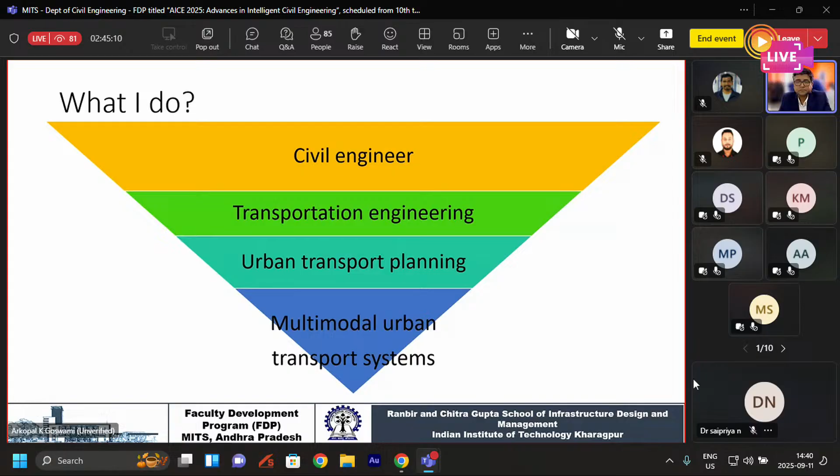And my work in the industry prior to my academic job was mostly in the urban transport sector. So when I decided to come and teach, I decided that that should be something I should focus my research and teaching on. So mostly I work in the area of multimodal urban transport systems currently. And what is multimodal urban transport systems? I mostly deal with urban surface transport, modes of transport that run on roads. Urban transport nowadays can also include water metros, but I don't deal with them a whole lot. And the modern way of transportation is looking at urban air taxis or even hyperloops, which I have not gotten into yet; my expertise is not in those fields. So mostly what I'm looking at is multimodal urban surface transport systems.

And it is an amalgamation of all of these various domains. So it is purely multidisciplinary in nature, where a student working on any problem at any given point in time has to have knowledge of at least two, if not three of these sectors, right? You have to at least understand street design, data analytics, urban planning and land use. Along with that, if you are interested, you need to understand user travel behavior, economics and econometrics, environmental sciences, which today's topic is relevant to, and information technology and infrastructure management. So there are so many branches of expertise that you need to solve any of the urban transport problems. That makes it very challenging. That's why we are constantly looking for specialized personnel in this field. So when we develop curriculum, we keep in mind that somebody graduating from our institutes is well versed in 2 or 3 of these domain areas, so that they can solve an urban transport problem holistically.

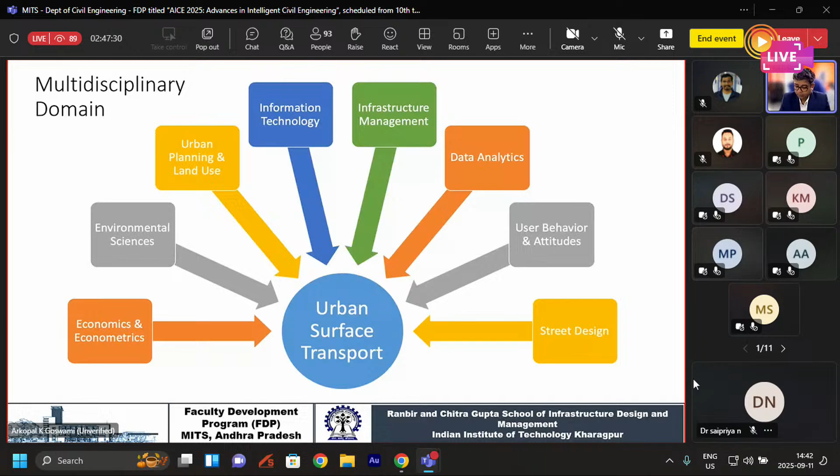Now, to give you an overview of urban transport and sustainability, right? Sustainability is something that we cannot shy away from anymore. Any system that you talk about, you have to think in terms of sustainability. But if you look at the urban transport scenario, you will see that there's a lot of unsustainability happening in India currently. Our motorization rate is growing at an alarming pace. The number of accidents on our roads is also growing at a similarly alarming pace, and the emissions are increasing day by day. So this trifecta of events is leading to a lot of issues or externalities in the urban transport scenario, where we see long traffic jams every day in metropolitan areas, or very poor infrastructure degradation happening even in smaller towns and cities.

And of course, when we talk about affordability, we see that the people who cannot afford expensive cars are left to contend with public transportation, which is not being upgraded, which is in poor condition, and over-congested systems. So affordability is going down, and equity is not being maintained.

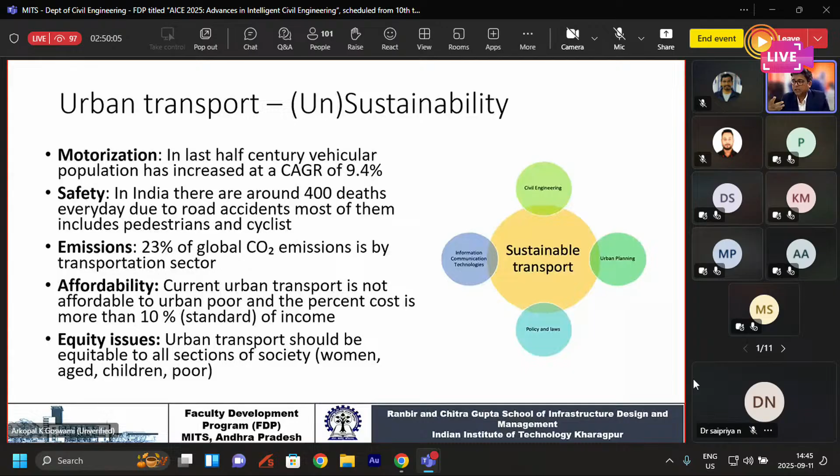A project is then looked upon as not solving the issues of the poor, but only looking at a certain section of society. So, all of these things put together, we are seeing a lot of unsustainability happening in India. And what I see is a cycle in which our cities are currently stuck. Right? If you look at this cycle, you will see that some of the things are an input to this cycle. Of course,

inputs to transportation which we cannot control, such as population growth and concentration of jobs in cities, right? There's a lot of population growth happening and many jobs being in the cities. A lot of people are migrating to cities, right? That is nothing that transportation engineers and planners can control. I mean, there's very little we can do in order to control that.

As a result of people having now suddenly moved to the city and having relatively better paying jobs, their household income is increasing. As the income increases, the first thing people think about is to own a motorized vehicle. It may be a motorized two-wheeler or a motorized four-wheeler. So now you have people who have moved to the cities and are starting to own more and more vehicles, which is now leading to the city's transport infrastructure being stressed.

Right, most of our cities are old. They do not have sufficient road network, and even if they have sufficient road network, the quality is very poor. On top of it, when this additional number of vehicles starts to ply, there's a lot of stress on this transport infrastructure.

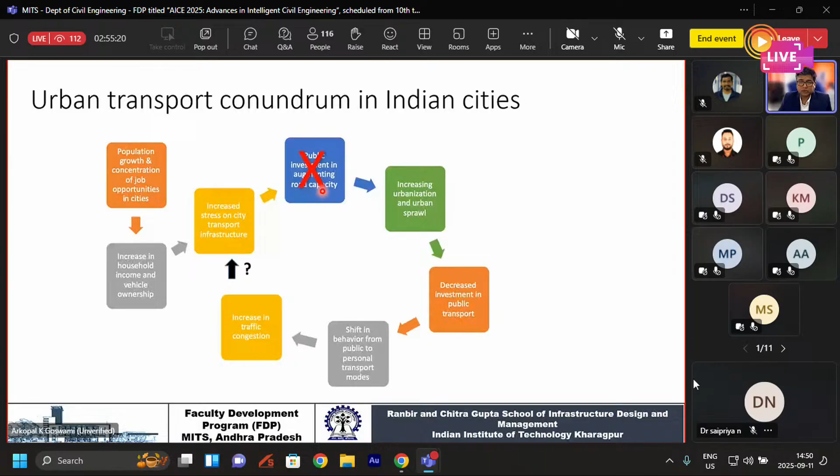So what experts say is one of the ways to do it is to not invest heavily in road capacity augmentation. Do not just widen roads. Widening roads is not a solution for reducing congestion or reducing emissions on the streets. So that's why many cities now are heavily investing in mass rapid transit systems like metros and LRT systems and other alternative public transport systems rather than widening roads, because they are not seeing the benefit of reduced congestion. So somewhere along the line, every city has to think about this.

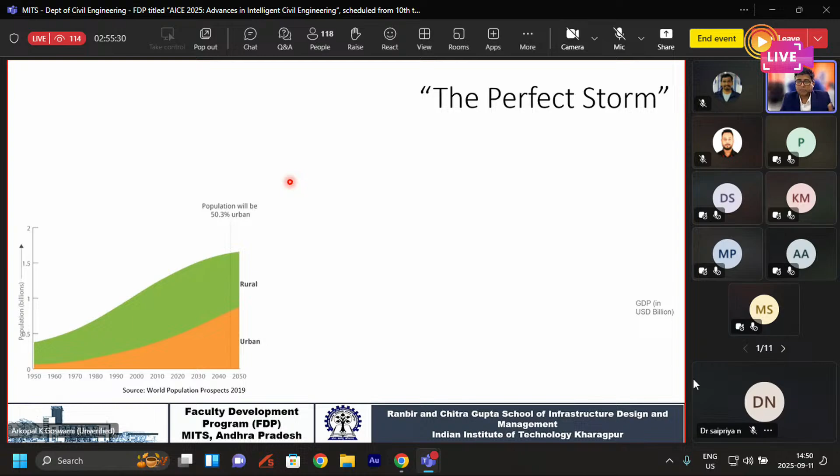Same thing graphically, if you look, there's so much rural to urban population that is migrating. If you start looking at imagery of your cities, just pick any city that you are living in, and if you start looking at the land use patterns over decades, you will see that the city is urbanizing. So this is the city of Kolkata. You will see that the red was the urban area back in 1991, but in 2017, the red has increased so much. So you'll see that there's so many people. Because of the influx of people from surrounding areas, the city starts sprawling.

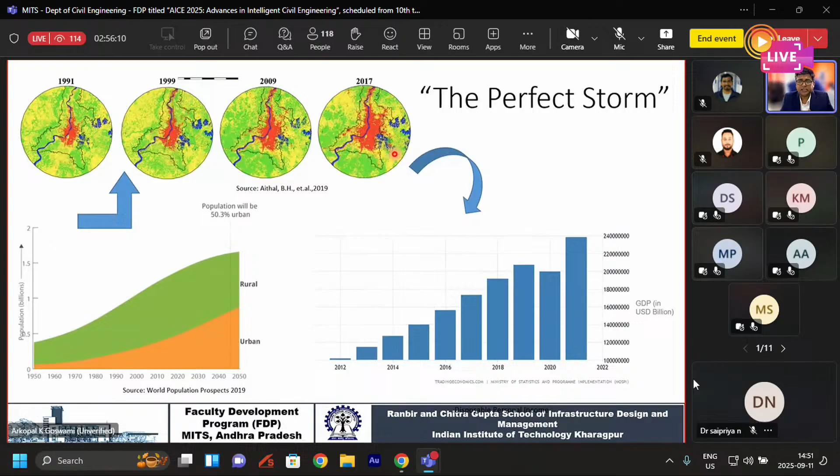As the city starts sprawling, the GDP improves, as urban areas are the engines of GDP growth. GDP increases. People have disposable income. You start looking at the number of cars registered. That is increasing exponentially. And if you start looking also at the borrowing rate, it is getting cheaper and easier to buy a car, because nobody pays full to buy a car, they purchase it at EMI. So the EMIs are getting lucrative over the years as well. And so a lot of people are owning these cars.

And this is leading to, of course, not just accidents, but also a lot of particulate matter emissions in our cities. Our cities during winters are becoming gas chambers. You cannot get out. You cannot breathe properly. The young are having a lot of pulmonary diseases. The elderly are not able to breathe properly. So this is an epidemic of gigantic proportions that is taking place in India.

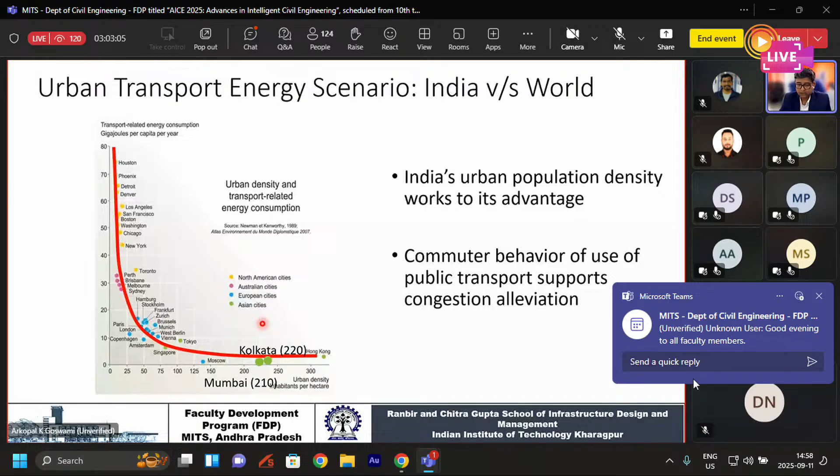All of this leads to our topic today of transport and environment, where we see that in the emission scenario, the transport sector is one of the most poorly placed sectors. Looking at different economic sectors, after electricity and heat production and manufacturing, you have 22% coming from the transport sector. So transport is responsible for almost 1/5 of carbon dioxide emissions, and we have to be very careful to develop strategies that help us reduce this 22% figure. This is a worldwide figure.

If you get into different modes of transportation, within this 22%, personal vehicles result in 40% of those emissions, and trucks and light motor vehicles are 34%. Put together, the surface transport sector is about 74-75% of the emissions coming out of the transport sector. So when we are dealing with cars and commercial goods vehicles in our cities, we have to be very mindful of how we can continuously monitor their emissions, improve the quality of mechanical equipment present in the vehicles, and at the same time decarbonize these vehicles.

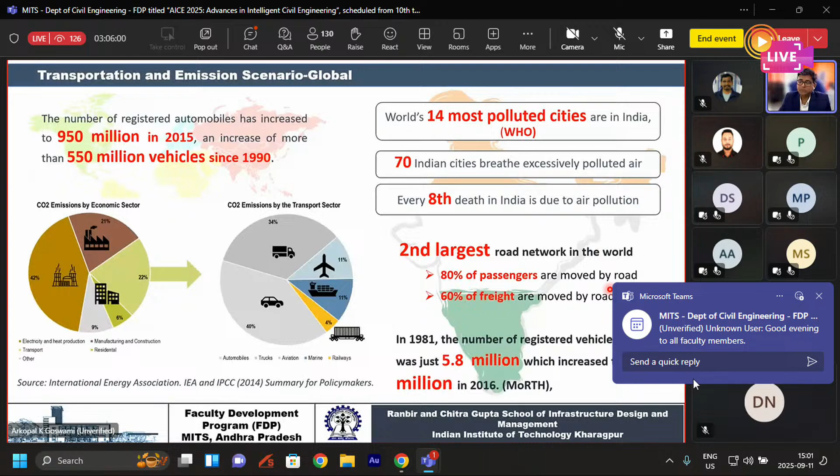This is again a snapshot. If you look at a calendar year, it shows Delhi's particulate matter PM 2.5, and you see that it is only during these monsoon months when you see a lot of green. Anything other than these monsoon months, you start seeing orange, red, and as you get into the winter season, December, January, February, there's a lot of poor air quality leading up to almost April and May, the peak summer months as well. So many days are way above the WHO limits that are prescribed, and it becomes very, very harmful to

citizens of various age groups. Vulnerable people who do not have a proper home to live in the urban areas, who are homeless, living in shelters, etc., are even more vulnerable, but so are people who are outdoors. If you remain outdoors for long periods of time, if your exposure is high, you are now having these irritable eyes, a lot of sneezing, and if you have asthma, you are really advised not to go out. So all of this is affecting our health, and health is eventually affecting productivity. If you want to tie it up to GDP, then you can see that all of this is eventually having an effect on the GDP of the country as well.

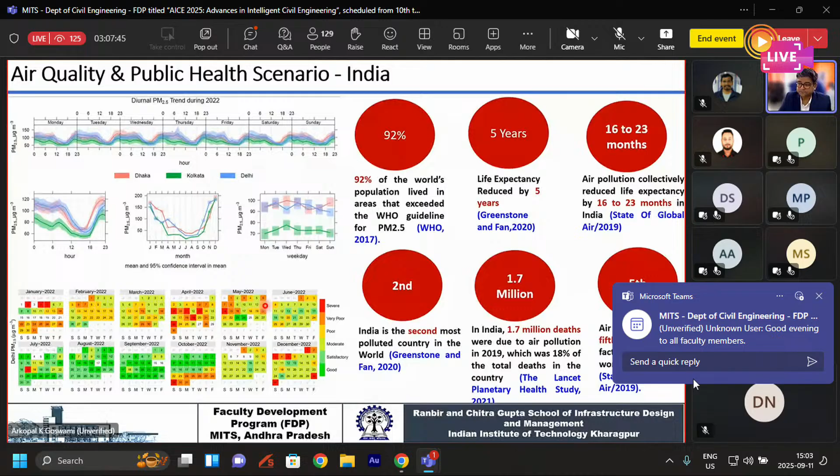As such, India and many other countries are now starting to heavily invest in sustainable modes of transport. Like I said, metro rails have been there in India for a long period of time. Kolkata was the first one to get metro rail. Nowadays, many cities are investing in that. But at the same time, metro rail is not an answer to all the cities. So there are many cities that are also looking at examples such as water metros, monorail, and BRT, which is bus rapid transit. So a lot of such mass transit investments are being made, with the intent to not only decongest the roads, but also to improve the environment or reduce the vehicle-related emissions.

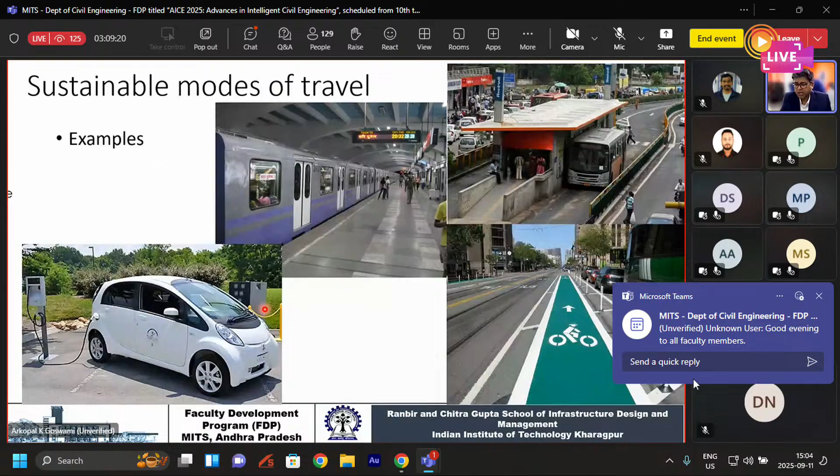These are examples of BRT, and as a part of that, electric vehicles come in, where now the tailpipe emissions can be completely or almost 99% reduced when you are using an electric vehicle. And we'll get into electric vehicles a bit more during the remaining part of our presentation. There are other modes of transport that are also getting some reasonable amount of attention now, which is improving bicycling in many of the cities, improving pedestrian infrastructure in many of the cities, and also some examples of

flexible work schedules, carpooling, etc., are also being implemented or experimented with when it comes to large employers, especially. They are encouraged that their employees should either carpool or try to reduce their travel to office every day by having a flexible work schedule. Maybe come into office 3 days a week, and the rest 2 days can be work from home or something like that, which eventually ends up helping the traffic congestion and traffic environment situation.

Congestion pricing is something that India has not yet successfully come up with a policy for, but many of the cities around the world which have faced a lot of urban transport related issues have tried out congestion pricing, which is to say that if you are using your personal vehicle and driving it alone, then you will have to pay an additional toll when you use it during peak hours, because peak hours are already congested. Peak hours already have a lot of emissions happening on the roads, and you as an individual are adding to that emission, adding to that worsening situation, and hence you are being asked to pay the price for using the road during that period of time. This has helped many of the other cities in the world reduce the number of personal vehicle users as they then shift to public transportation, and in that way helps reduce congestion as well as improve air quality.

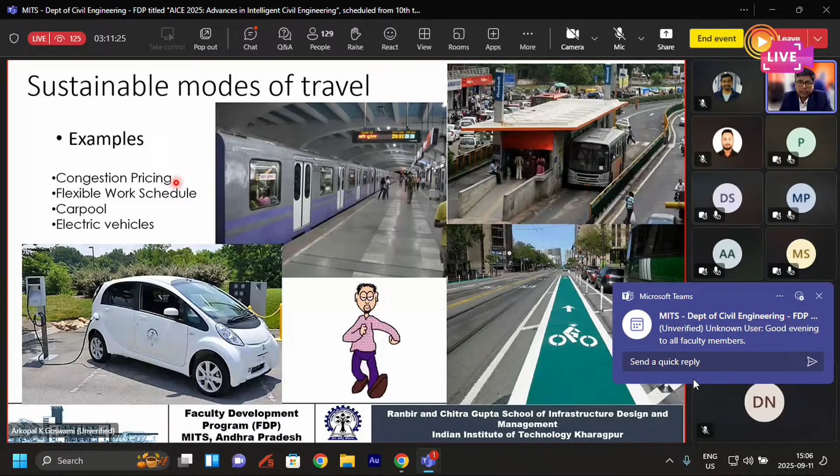In India, you will see that there are a lot of monitoring and mitigation programs that have been introduced over the years. We have our emission standards for every vehicle that are set up by the Automotive Research Association of India, ARAI, which tells you how much emissions are going to come out of which type of engine, which type of vehicle, etc. So all the manufacturers have to follow these standards, and then of course when the vehicle starts getting older, you have to get your pollution under control certificate, PUC certification, every year or every 6 months, so that it can be confirmed that your vehicle is still not polluting heavily on the roads. Such kind of systems are in place.

There has been improvement in the fuel technologies. Now we are at BS6. We have jumped from BS4 to BS6, which has reduced the content of nitrous oxides, etc., in the fuel, and hence we don't see those black fumes that we used to see a lot coming out of, say, for example, heavy vehicles in our cities, trucks, etc. Now that has reduced to a large extent.

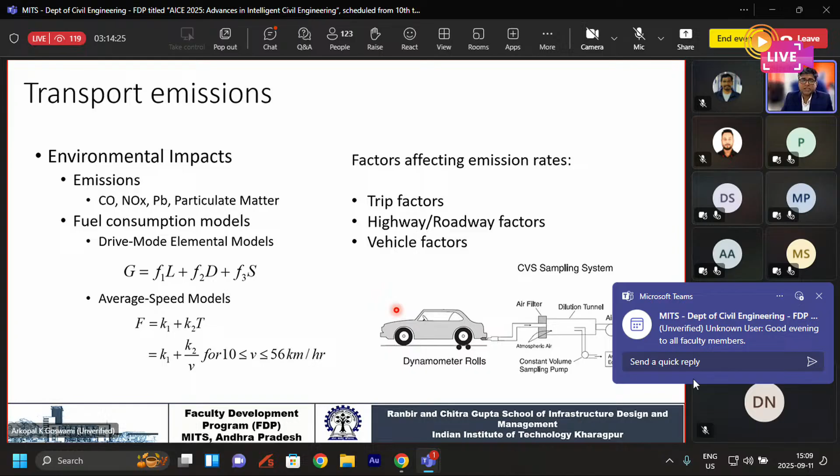But what is happening more and more now is there is a need to continuously monitor, not just when the vehicle comes to a PUC center, but also continuously monitor emissions when the vehicle is being run in actual conditions on the road, right? That is the need of the hour, because emissions happen on the road. If we can catch and understand which vehicle is emitting more, that is when we can enforce some stricter laws, etc.

So in that sense, there have been experiments and on-field testing of remote sensing technology to understand which vehicle is emitting poorly or performing poorly in terms of emissions on the streets. In Kolkata, there were experiments carried out by the transport department where vehicles on the roads were channelized, and several air quality monitoring devices were put alongside these road channels, and a video camera was also put there to catch the license plate of the vehicle. So this is supposed to remotely sense how much tailpipe emissions is coming out of it.

Of course, these have to be repeated over and over again so as to get the accuracy high. But nevertheless, this allows you to monitor a large volume of vehicles and their emissions while they are on the road. You also have your PEMS, portable emission measuring systems, that can be installed within the vehicles, and while you are driving, it gives you the emissions coming out based on your acceleration, deceleration patterns, etc. So there are different monitoring techniques that are now being utilized or tried out or researched in order to better understand the emissions coming out.

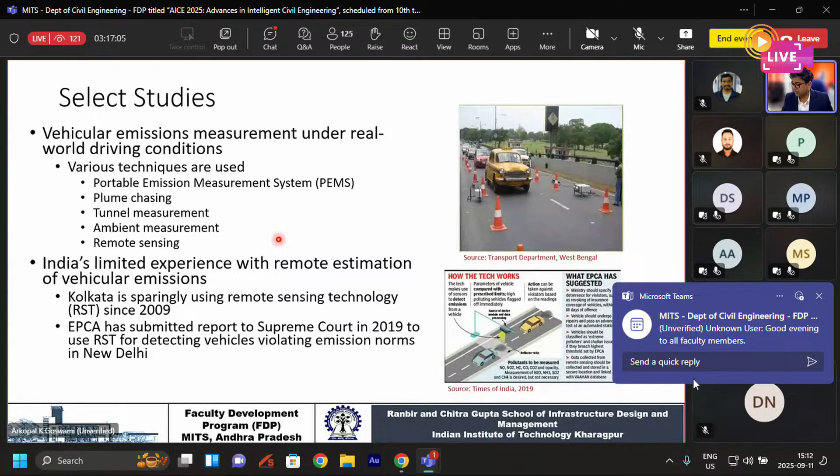We cannot wait for the entire fleet to be electrified and not do anything at this point in time, right? Electrification will probably eventually happen, but the damage would have been done in the next 20-25 years if we don't continue to monitor the working conditions of the ICE engine vehicles as well.

So we did a similar kind of study to understand how to remotely capture the tailpipe emissions coming out of a vehicular stream. We were not interested much in the individual vehicles. Our aim was not to punish the person. Our aim was to figure out, in an area or in an intersection, what is the air quality measurement, and how much of that air quality is because of transport vehicles.

Because, as you understand, in an intersection there may be many other types of land uses, such as street side vendors, restaurants, and many other point sources of pollution. But what we wanted to understand was the extent of the air quality to which the transport vehicles are responsible. So we did a similar setup with our devices as well, with the emission device and the camera setup alongside the road.

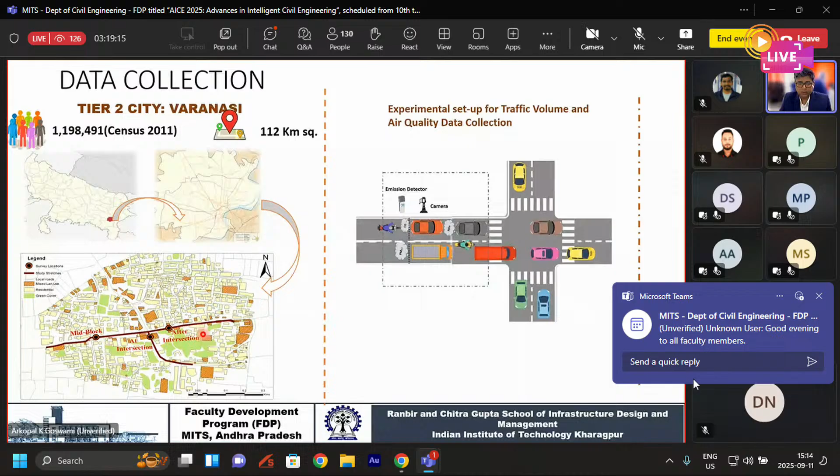So we were trying to differentiate the air quality, or to differentiate the emissions based on where the vehicles were in relation to the intersection. Again, these are published papers. You are welcome to study the entire paper, or if you drop me an email, I can send you the

papers as well. We found that there was good correlation when it comes to carbon monoxide concentrations and the morning peak time of vehicles, whereas the correlation was not that great during the evening peak, or maybe we thought 5 o'clock to 7 o'clock was the peak. Maybe the peak is a little bit later in those cities. However, we have 24/7 data. We have a full 24 hours data for this.

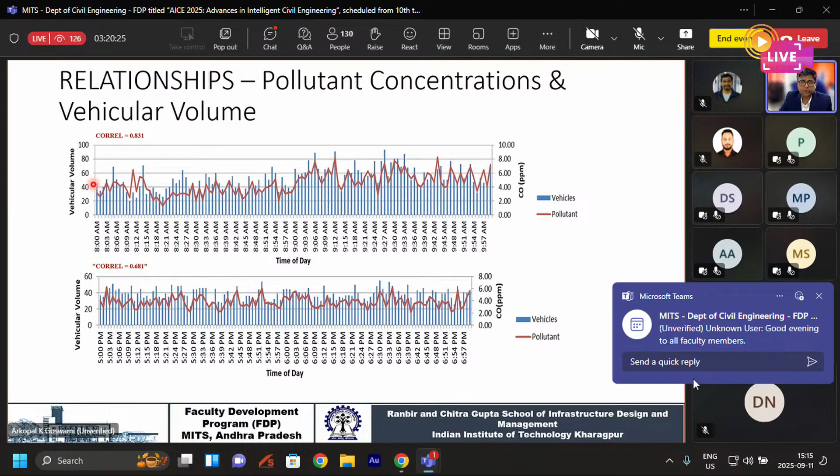So this tells us that emissions or pollutants do have a relationship with the vehicular volume. So this is the vehicular volume every 3 minutes, as you can see, and pretty much the pollutant concentrations are peaking when the vehicular volume is also peaking. So there is a relationship, and hence, at least at a planning level or at a policy level, we can monitor such areas which are highly polluted in our cities and target those areas for some strategic interventions.

We did a multiple regression of carbon monoxide concentrations against different variables, and of course you could see that the role of heavy vehicles was very high in the pollutant concentrations, whereas cars, two-wheelers and three-wheelers were very less, and followed by the heavy vehicles, the impact of cars is also pretty high. And also the rest of them are time of the day, location, whether it's mid-block or after intersection, and so forth. And we got a decent regression coefficient for that as well.

So we developed these spatiotemporal maps as well, which helped us understand the differences in emissions when it comes to a collector stretch versus an arterial road. Collector roads usually do not have high volume of vehicles, hence you'll see that emissions are still in the green stage, whereas as you get in the arterial stretch and as you start getting away from the intersection, as the speeds start increasing, the emissions start increasing as well. Whereas closer to the intersections, as the speeds are low, the emissions are low.

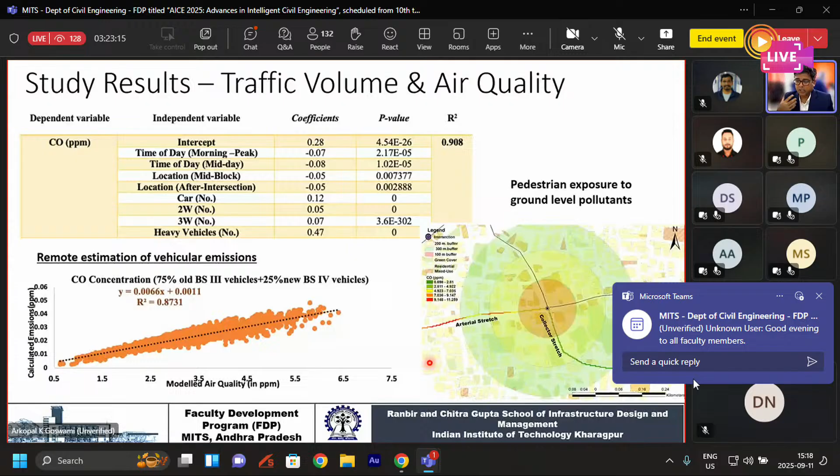So inhaled dose calculations is another step that we did beyond this to understand, if you are a pedestrian, how vulnerable are you? If you are in a two-wheeler, how vulnerable are you? If you are in a three-wheeler, what is your vulnerability, etc. So it's a lot of health issues that have shown up.

I can tell you, we also did another study which is not yet published, where we looked at auto rickshaw drivers who are constantly in the traffic throughout the day, and how their health is being affected because of this constant exposure to air pollution. We may not be exposed for long periods of time because we may be indoors mostly. Well, indoor air pollution is a different matter, but outdoors, you can imagine how long we are outdoors in a day. But these auto rickshaw drivers, for their livelihood, are outdoors all the time.

And when we inquired about their health, there were some very strong correlations between how many hours they drove and what are some of the medications that they are taking, etc. So very, very interesting research. However, it tells us that the situation is very acute and needs a lot of interventions.

That moves us along to the electric vehicle scenario. They have now been around for a long period of time. Back in the day, in the early 20th century, we used to have a lot of electric vehicles as well, because at that point in time, we had electric street cars, etc.

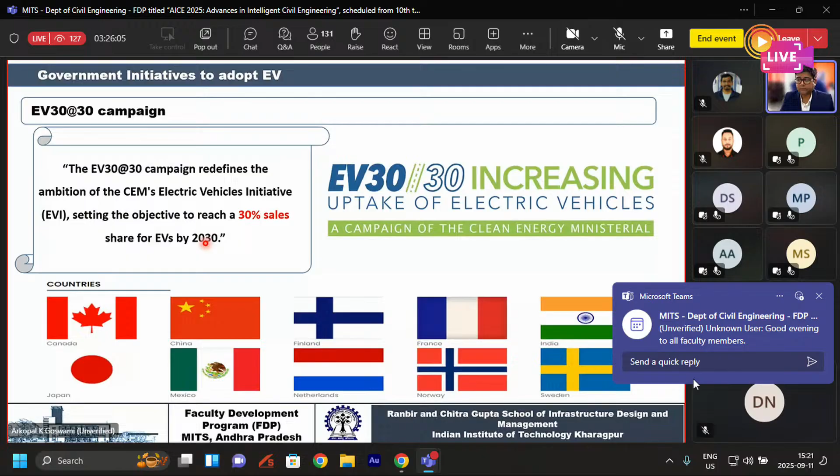Our ambitious target is 30% sales by 2030. We are yet to get there because there are many hurdles that we have to get past. Why is it needed? Of course, energy security is a big thing worldwide, as we see that there is continuous turmoil in the world because of energy requirements.

So hence, electric vehicles are a necessity to move away from fossil fuels, to support clean electricity, lower emissions, improve citizens' quality of life, and to establish a policy of robust market. So we are still building up in our country the infrastructure that is required to support electric vehicles. That is ongoing.

Pros are pretty much self-evident, whereas there are some cons that are hindering the uptake of electric vehicles in India. Many people have what is called range anxiety. They are always anxious that we don't have enough charging stations on the road. So what will happen if my electric vehicle runs out of charge? So that is something that people are very, very worried about all the time. Recharge can take a while.

What do I do? So again, if you take the example of an auto rickshaw driver, currently if his petrol is over, he goes to a petrol pump and petrol is refilled in 2 minutes. Whereas if he had a battery, how long the battery will take to recharge depends upon whether you have a fast charger or slow charger at the battery station. Do you have swappable batteries or not?

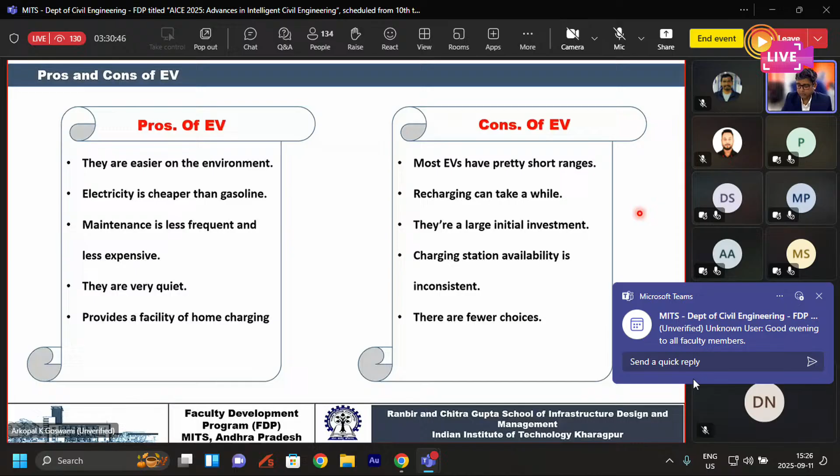So that is something that has to be looked into, because while we are tackling the problem of emissions, or tailpipe emissions, by introducing electric vehicles, we are not really solving the problem of congestion, which is a problem of space and space requirements in our urban areas. So that needs to be also looked into.

Electric vehicles. The other point of electric vehicles is there are various types of electric vehicles that are out there that are being used in different countries. There are plug-in hybrid electric vehicles. There are pure electric vehicles, and what India is heavily investing in is the battery operated electric vehicles, the BEVs.

There is some talk now that BEVs are taking a lot of time to come up, or the sales are not picking up. So maybe there is some opportunity to look at plug-in hybrid electric vehicles, hybrid electric vehicles as well. So we'll have to see how far the policy can be tweaked in that regard.

One of the important things, however, to remember, and we'll also look at this through the lens of a study that we did, is that charging still is not green. Charging of electric vehicles is still not green. We are still dependent on charging stations that are providing electricity through coal, and hence to completely decarbonize, we have to also look at renewable sources of energy to be used at the charging stations themselves. So that is one of the things that government policies are also looking at, how to make the entire life cycle green as well.

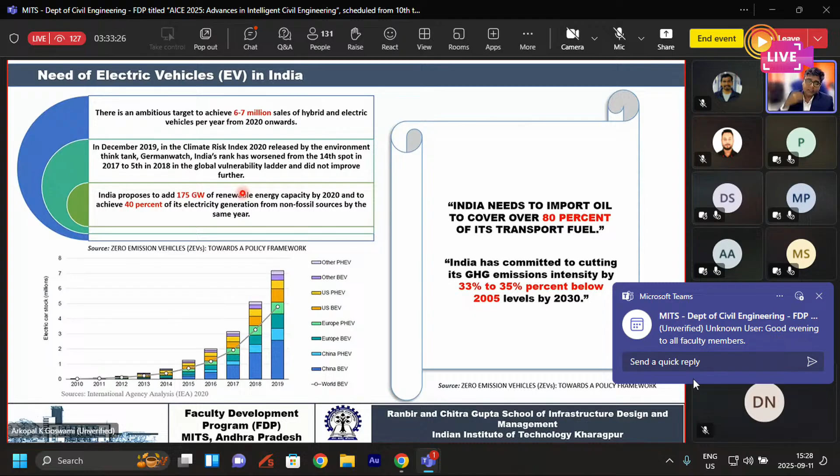Remember, we are not looking at other life cycle elements of an electric vehicle, because if you start looking at how much energy it requires to manufacture an electric vehicle, and what is the source of that energy, you'll again see that probably the energy source is non-renewable. So there is a lot of work and a lot of research that needs to be done, but at least we are starting with the lowest hanging fruit, which is to minimize the tailpipe emissions of the vehicles by electrifying them first.

Here you will see many of the schemes that are being put forth by the central government in India. In addition to that, many of the state governments have their own schemes as well. Remember, transport is a state as well as a central subject, so it's on the concurrent list of the Constitution. So even the states have various schemes that allow you to purchase an electric vehicle, get subsidy on it, etc.

At the same time, the number of electric vehicles sold is not that high. Even today, it has picked up a lot, especially after COVID. There has been a marked increase especially in electric three-wheeler sales, the electric auto rickshaws, and so has the electric two-wheeler segment. However, the electric four-wheeler segment is still sluggish, and one of the segments that needs a great push is the electric public transport sector.

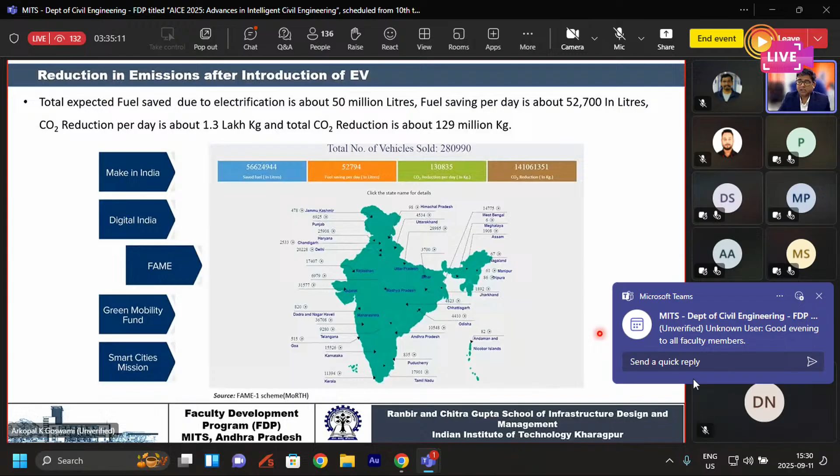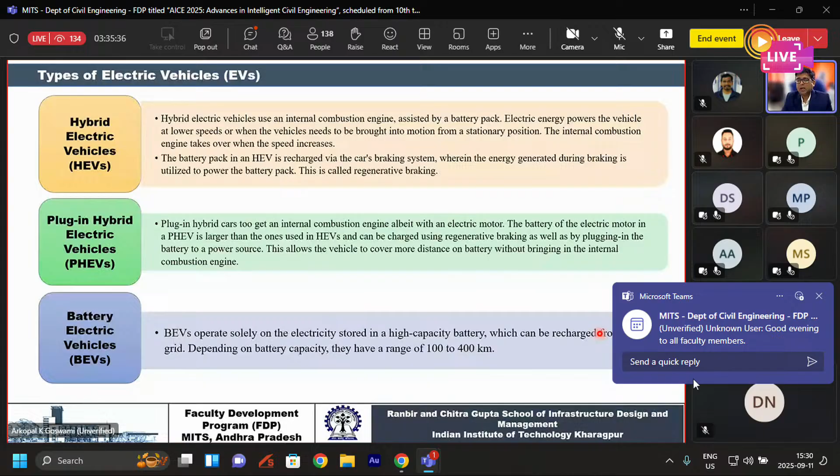Not many cities have invested in buying electric buses yet. Some of the large metropolitan cities have, but not all of the tier 1 or tier 2 cities have invested in that, and that is something that needs to be looked into. Types of electric vehicles, like I briefly said, there are hybrid electric vehicles, plug-in hybrid electric vehicles, and battery electric vehicles. We are currently looking exclusively at battery electric vehicles, whereas there is some talk at the policy level to also look at hybrid electric vehicles, but that needs to be further deliberated.

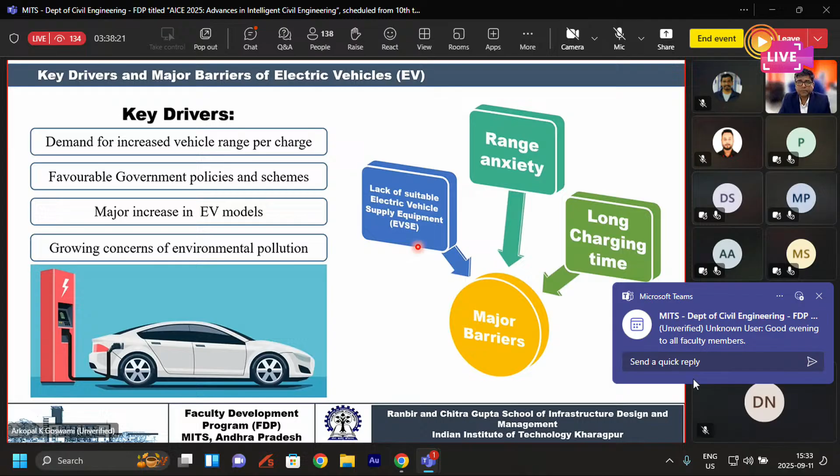So this is again one of the studies that we did, which was funded by, I think, ICSSR, where we were looking at how electric vehicles are being perceived by the consumers themselves. This study was done way back in 2019, pre-COVID, and we were at that point in time trying to examine who are the people who are likely to purchase an electric vehicle, because electric vehicle purchase was not picking up pace. Even though subsidies were being granted under government schemes, people were not buying electric vehicles.

So we were looking at what is the perception of people, what do they want, why are they not looking to purchase or have an electric vehicle at all. So you would see that a very, very low percentage of people said that they own an electric vehicle. About 13% of people say that they have no interest in electric vehicles. But the majority said, I have some interest in electric vehicles, but today's electric vehicles don't meet my needs.

There are a lot of people who believe that electric vehicles have not reached a certain threshold that makes them trustworthy or something like that. People need to have trust in brands, in the companies, before which they do not usually buy. So there were a lot of people, when we asked them, when are you likely to buy? When do you plan to purchase an electric vehicle?

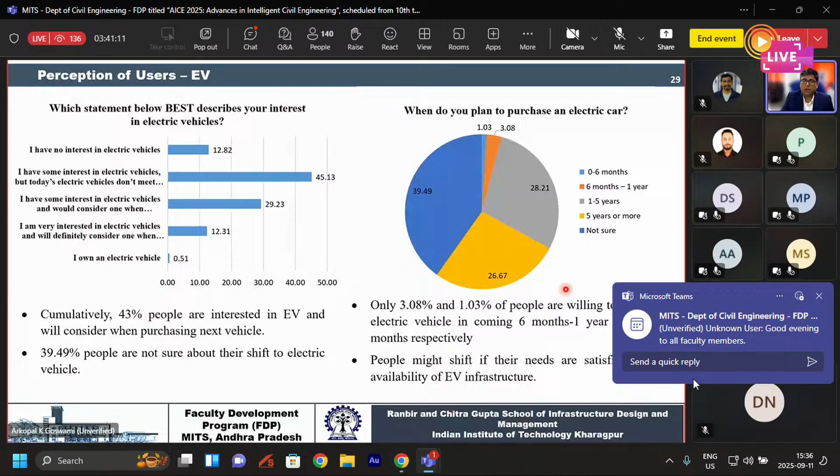Again, a lot of questions were asked. Basically, we were trying to do a choice modeling exercise to understand which are the factors that are driving their need and which are the factors that are inhibiting them from owning an electric two-wheeler or four-wheeler. Many things came out. Many people wanted cheaper insurance. They didn't know what type of insurance would be available for electric four-wheelers or electric two-wheelers. They all agreed that they are environmentally friendly, but they also knew that range was very important.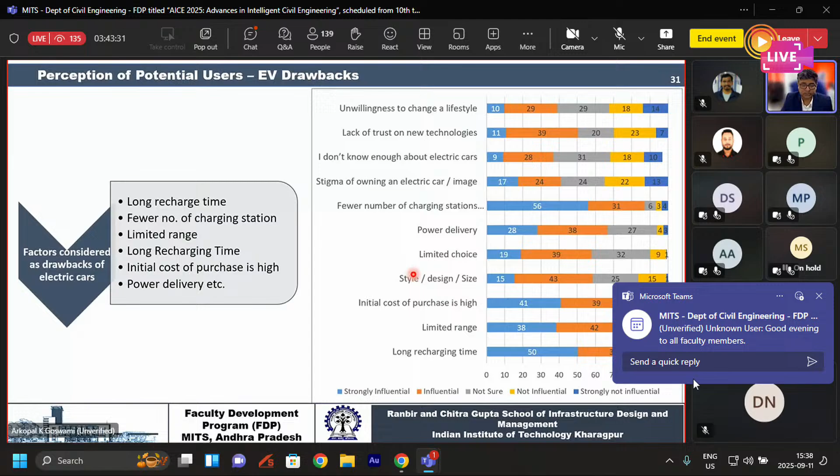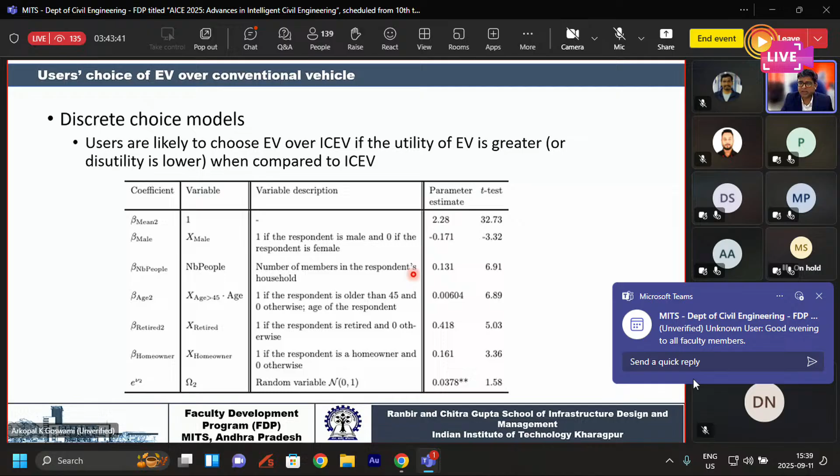We developed discrete choice models in order to understand why they are likely to choose an electric vehicle or an ICE vehicle over each other. The models, again, these are all published material, but if I can quickly say that we did it for 4 different cities. I think Delhi was the city we compared these 3 cities against.

So Delhi always had the highest, people in Delhi were the most likely to adopt electric 2 and 4 wheelers, possibly because there is a lot of awareness in Delhi, because any of the schemes that used to come out would come out in Delhi first, being the capital of the country.

And then we saw that Mumbai, Bangalore, and this was an ordered logit model, which means the question was, when are you likely to purchase an electric vehicle? And it was on an ordered scale, 1 year from today, 2 years from today, 3 years from today, so on and so forth. So Mumbai was the one that was second on the list, followed by Bangalore, and people in Kolkata said that they would purchase it only after a long period of time. They were not ready to purchase it at the same time, or ready to purchase it within the year.

So what that also tells us is that there's a lot of variability within the country. We cannot have policies, even at a metropolitan level, we cannot say that all 4 metropolitan cities are thinking in the same way. Even within metropolitan cities, there is variability. And of course, when we are now trying to replicate this study in tier 2, tier 3 cities, we are also initially witnessing that their demand levels or their demand patterns are even different from what people want in metropolitan areas.

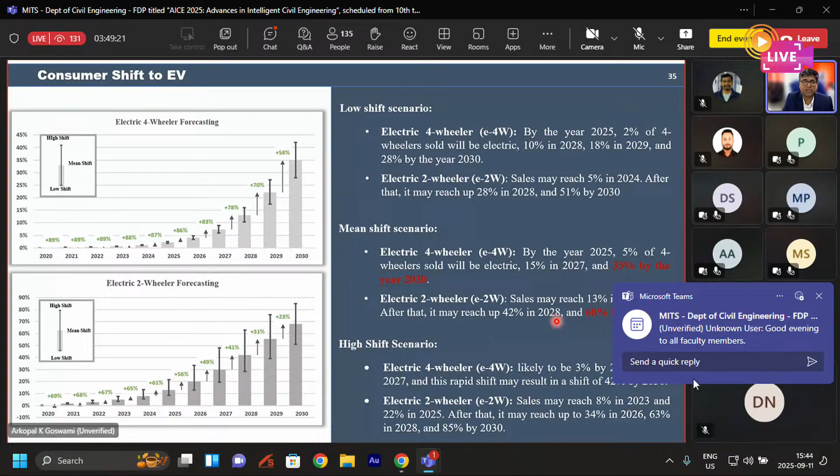Just a glimpse into what we are trying to do now is to kind of develop certain applications for people who do not have an electric vehicle and have a regular vehicle, in order to understand if they would like to shift to a different type of mode for their commuting purposes, given the pollution that they are exposed to, or given the pollutants that they are exposed to during their trip. Right?

Currently what usually happens is you give an origin destination to Google and it gives you the shortest time, or sometimes if you are in a metropolitan area, it also gives you public transport time versus driving time, etc. But it does not tell you what is the exposure that you are likely to face when you are traveling between those two destinations. Newer ones, for some of the cities, now you are able to see the energy consumption that is likely to happen when you drive.

But what we are also trying to find is what is the pollutant exposure that you are likely to face when you are traveling from point A to point B. And if you see that your exposure is high, how willing are you to shift to a different mode, which is a greener mode, or to a different route, which may have lesser pollution. So we are trying to nudge people towards greener modes of transport through the use of an application.

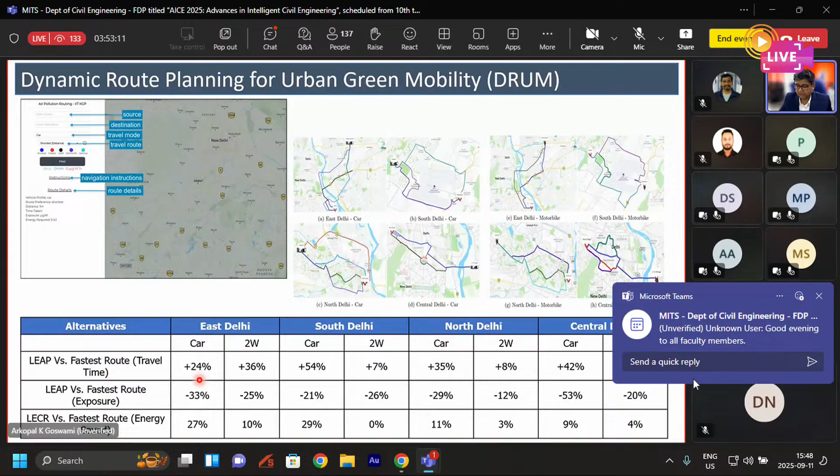So this is a trade-off that every individual has to make. Is it okay for me to take a route that will take a little bit longer to reach, but will reduce my exposure by 1/3? So these are trade-offs that we are going to test using this application. How many people make these trade-offs? How many people say that, okay, this is fine? How many say that, no, this is not good, I have to reach on time and I can risk the air pollution, etc. So this is the kind of application that we are trying to develop at this point in time.

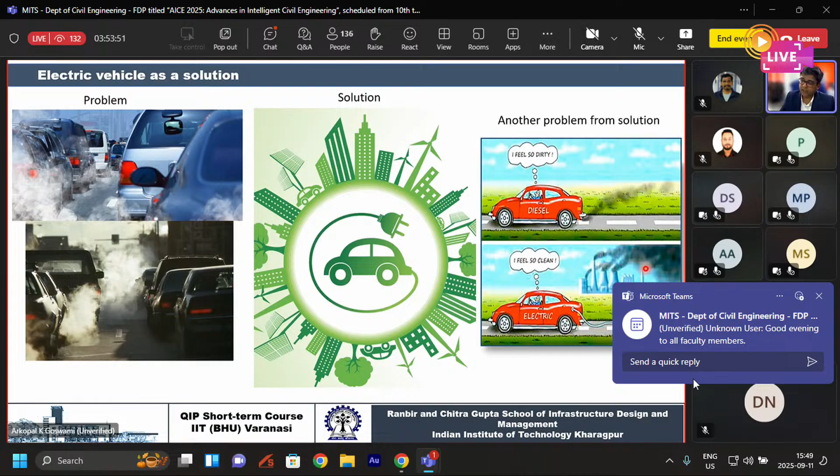Also, what we have tried to do is calculate life cycle emissions of electric vehicles and say that this kind of scenario should be avoided, right? We should not be thinking that, well, in a diesel car there is so much pollutant, so I feel dirty, and now that I'm in an electric car, I feel so clean. However, the emissions are only now being displaced from the vehicle's tailpipe to somewhere in a thermal power plant. So this kind of situation should also be avoided.

So we did again a study which was looking at life cycle emissions of electric four-wheelers versus ICE engines, and you can find out that given the energy mix that we have currently in India, we are just about on the good side, on the viability side of introducing electric vehicles. Because we still have over 60% of our energy coming from non-renewable sources, and the amount of electric vehicle penetration that is there makes electric vehicles still viable.

But if our energy dependency on non-renewables increases any further, then it doesn't matter how much electric vehicle penetration we have, we will eventually not have a complete green mobility mode because we will still be drawing energy for charging from non-renewable sources. So that is one thing that we were able to find and measure.

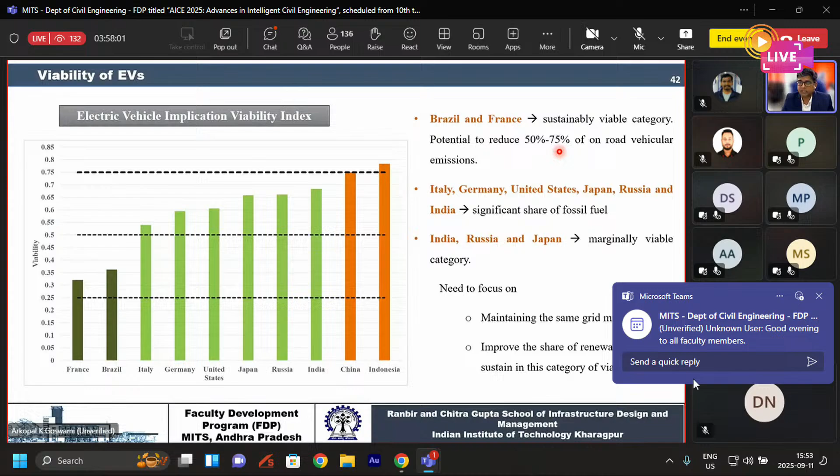These are, again, the viability thresholds that I had talked about. India, Russia, and Japan are marginally in the viable category. Italy, Germany, United States have a significant share of fossil fuel. So the United States is also not doing that great, whereas Brazil and France are in a very sustainable, viable category because their energy mix is very diversified at this stage. So the introduction of electric vehicles is going to reap them much higher benefits of emission reduction as opposed to the other countries here.

Going to even more nitty-gritties of electric vehicles, we have to look at battery technology as well. Lithium-ion seems to be the one that everybody is looking towards because of its light weight and small size. Weight is one of the more important things when it comes to its installation in electric vehicles, and eventually in commercial vehicles as well, because if the batteries get bulkier, it will reduce the efficiency of the vehicle as well.

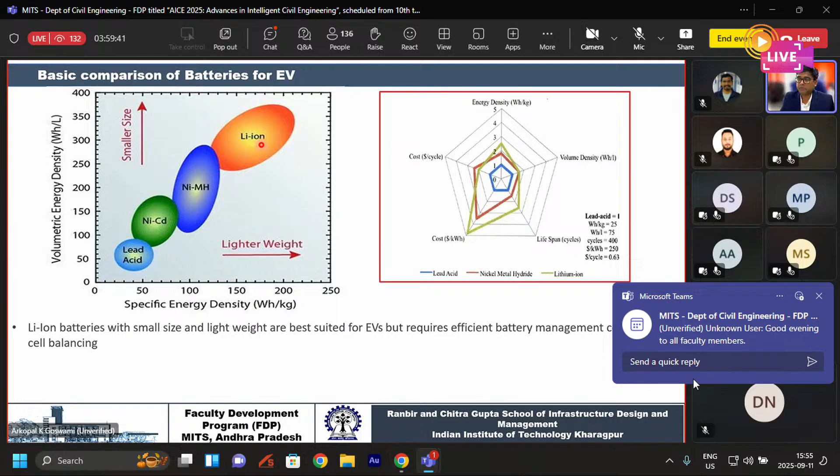So these are even more minute details that a civil engineer who is a transport planner now has to understand, going out of his or her comfort zone, if you really have to plan to decarbonize the transport sector, right? If you really are interested in reducing emissions on our roads, you cannot just say, well, I will look at electric vehicles, or I will look at the demand side, I'll look at public transport, I'll look at providing more electric buses. You also have to look at the technologies involved in these electric vehicles, so that you can have a holistic solution to your problems.

When it comes to chargers, that is another point that comes up all the time in electric vehicles. What level of charging should be provided at which locations is very, very important. Everybody wants a DC fast charger, but where it is ideally possible to be located has to be decided. Where can you still get away with having a level one 120 volt charger? Where can you move to an intermediate level charger and still provide enough relief to the battery that is discharging at a high rate? This also needs to be looked into.

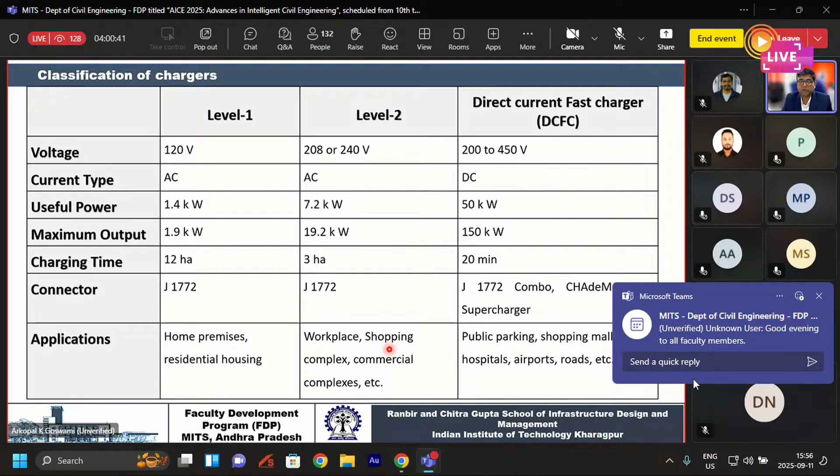There are basic methodologies that have been developed to locate a public charging station, not private charging stations. So how do you calculate in your city where the charging stations should be, right? Theoretical flow charts and theoretical models have been developed to do this. However, these have to be tested in the field to figure out how important, how feasible, and how useful the location that is finally recommended is.

As part of the government's initiatives, there are a lot of charging stations coming up under FAME 2, but they are not anywhere near being enough. We have to have a lot more charging stations designed and deployed in the field.